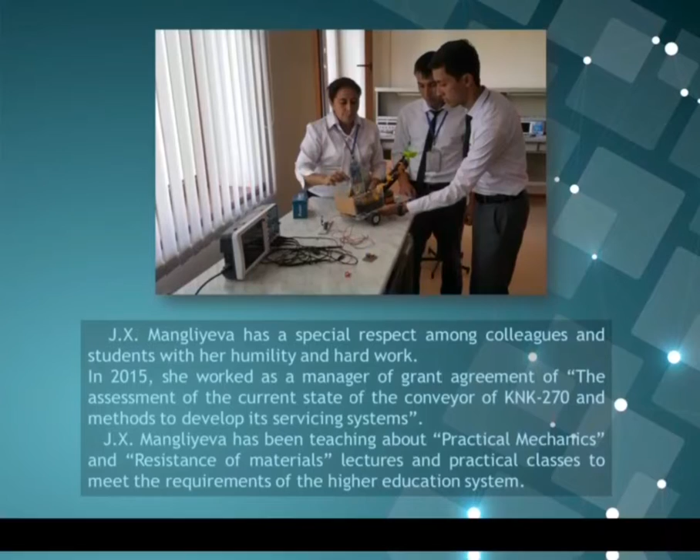Now I'm in charge of working with talented students in the Faculty of Energy Mechanics and also working as head of Women Committee. I have been teaching my students about practical mechanics and resistance of materials in order to meet the higher requirements of the higher education system.

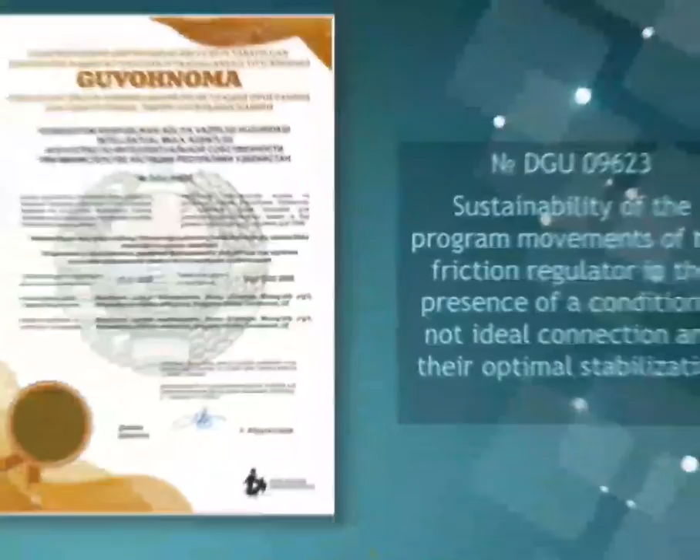While you are watching my video presentation, you will be informed about my achievements and about my awards that I had won over the period of last 15 years.

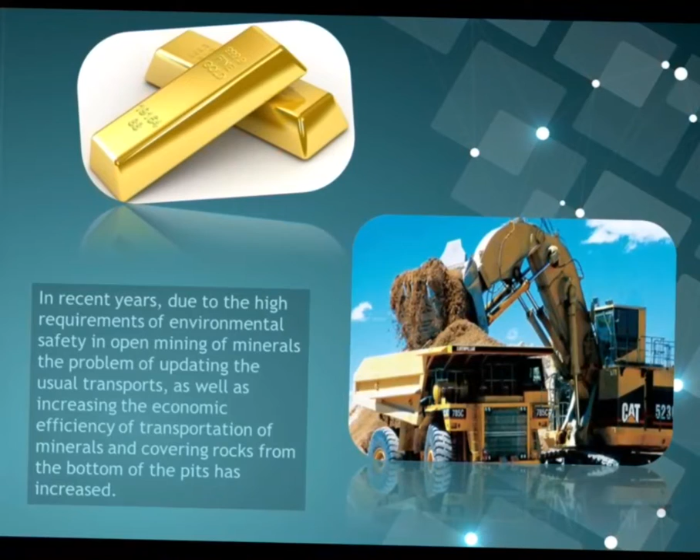Now it's time to move on to the main theme of my scientific research. In recent years, according to higher requirements of environmental safety, we have been facing several problems in terms of usual transports, as well as increasing the economic efficiency of transportation.

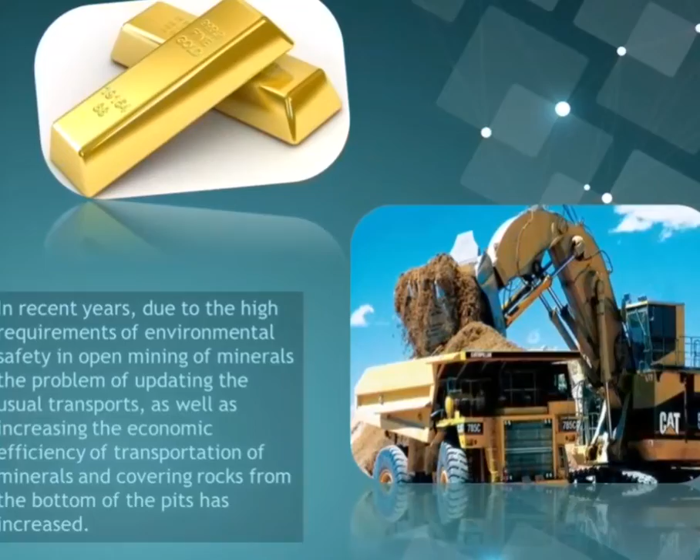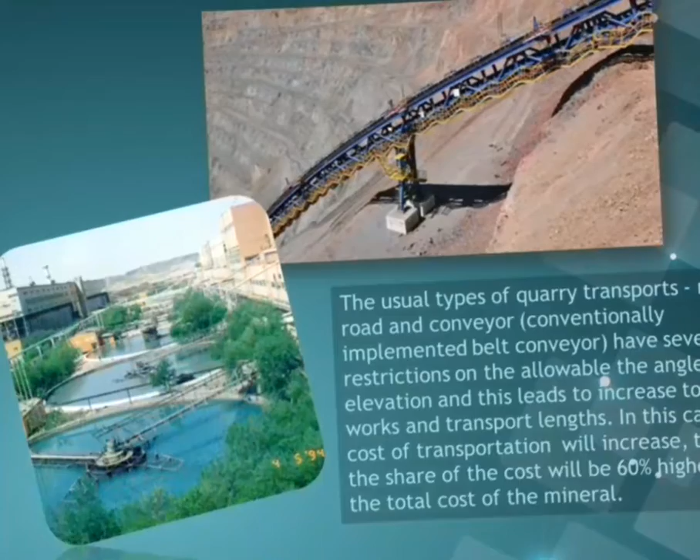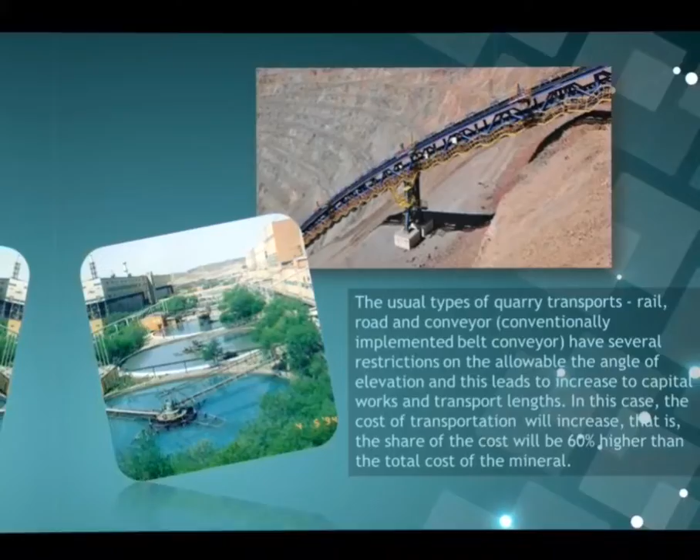I have done some research about usual types of transports in the field of open mining technology, and we found that according to the angle of elevation, the total cost of transports increases. It means that the share of the cost will be 60% higher than the total cost of minerals.

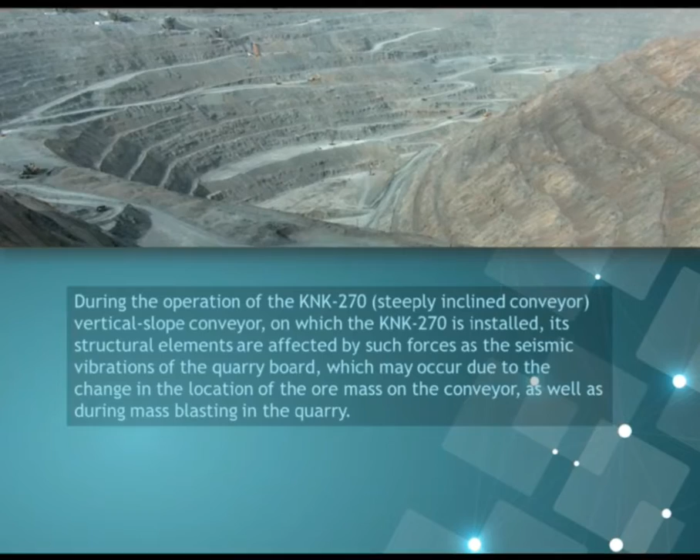Let me tell you about the KNK-270 conveyor. It's a steeply inclined conveyor, also called a vertical slope conveyor. When we install KNK-270, its structural elements are affected by such forces as the seismic vibrations of the quarry board, which may occur due to the change in the location of the ore mass on the conveyor.

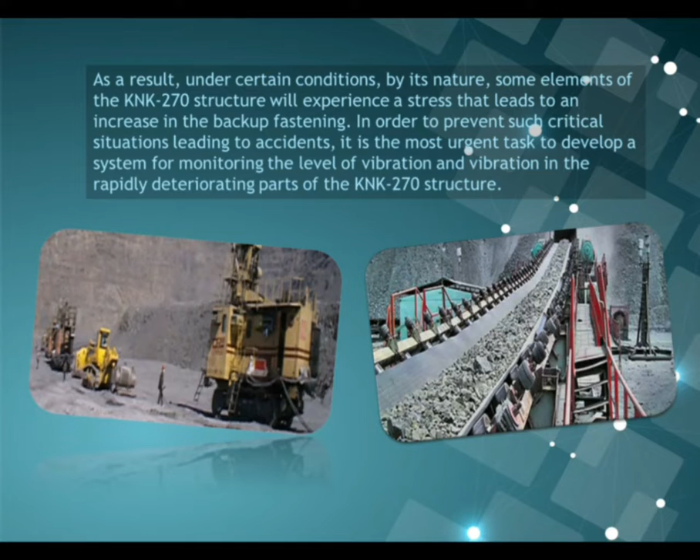As a result, under certain conditions, by its nature, some elements of the KNK-270 structure will experience stress that leads to an increase in the backup fastening. In order to avoid this kind of situation, which can lead to accidents, the most urgent task is to develop a system for monitoring the level of vibration in some parts of the KNK-270 conveyor.

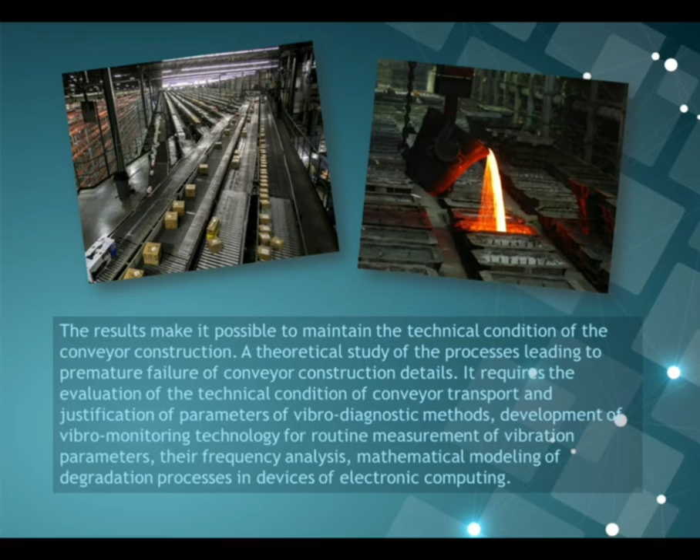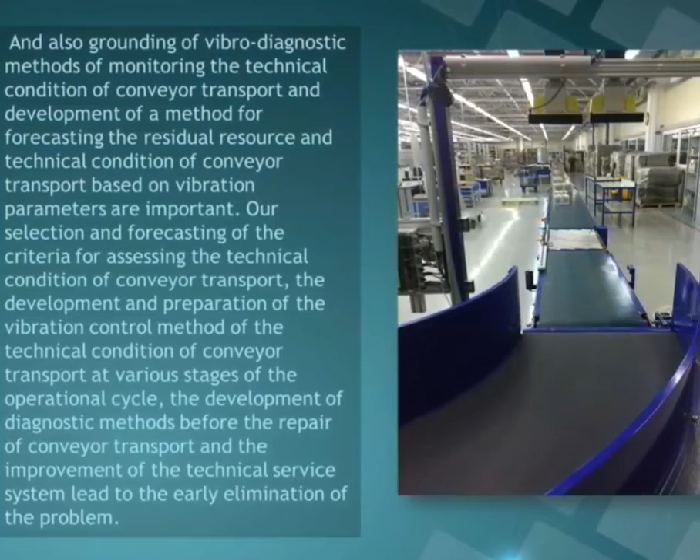It requires the evaluation of the technical condition of the transportation and justification of parameters of vibrodiagnostic methods, their frequency analysis, mathematical modeling of the degradation process in devices of electronic computing, and also grounding of vibrodiagnostic methods of monitoring the technical conditions of conveyor transport, and development of a method for forecasting the residual resource and technical condition of conveyor transport based on vibration parameters are important.

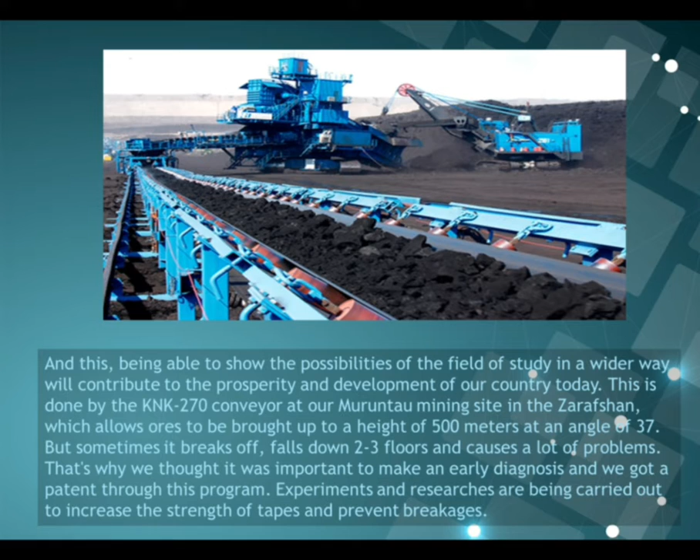The research has been done on the KNK-270 conveyor at Muruntau mining site in Zarafshan, which allows ores to be brought up to a height of 500 meters at an angle of 37. But sometimes it breaks off and causes a lot of problems. That's why we thought it was important to make an early diagnosis, and we got a patent through this program.

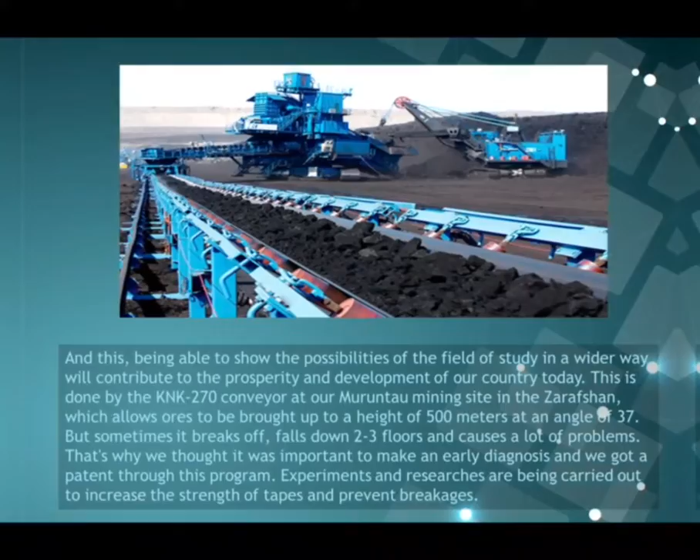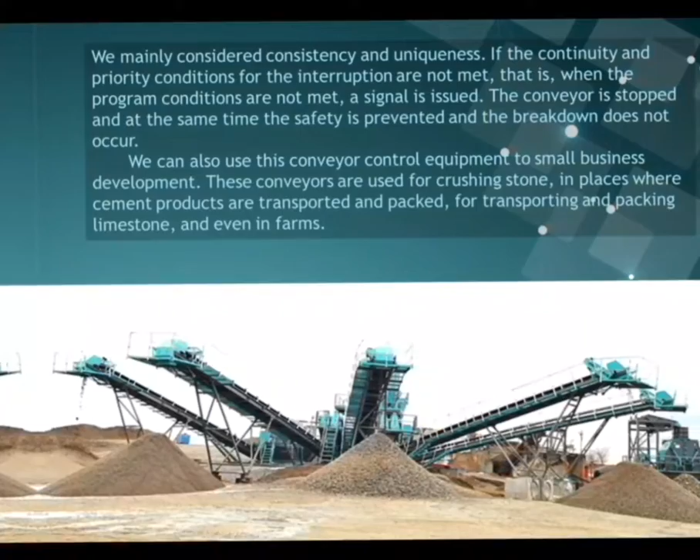Experiments are being carried out to increase the strength of tapes and prevent breakages. These conveyors are used for crushing stones in places where cement products are transported and packed, for transporting and packing limestone, and even in farms.

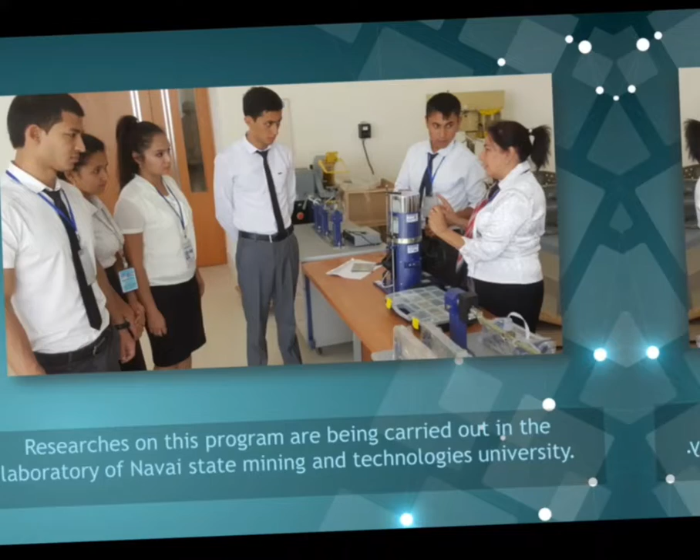Research on this program is being carried out in the laboratory of Navai State University of Mining and Technology. This program is going to be used in manufacturing factories, and students are working on it to make it more efficient. Thanks for watching this video presentation, and thanks for your attention.